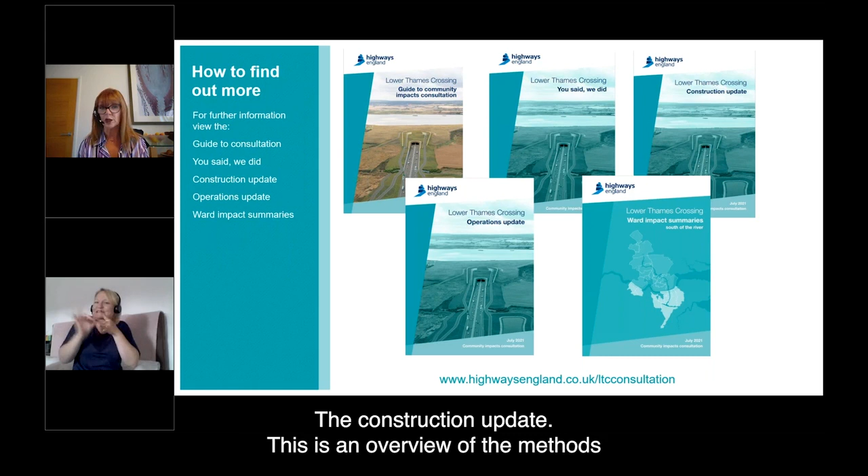The construction update is an overview of the methods that would be used to build the new road and tunnel and changes to existing utilities infrastructure. It also details the measures proposed to mitigate potential adverse effects of construction.

The operations update provides information on the new road, on junctions, the tunnel, utilities, environmental design, and green infrastructure. It also includes the impact the new road may have near you, the changes we've made since the last consultation, some updates to our traffic forecast, and how the new road would impact the environment. Sorry for the little glitch there.

And if I could recommend one set of documents to you, it would be the ward impact summaries. These documents go into a lot more detail about the changes and impacts the new road may have near you during its construction and operation. This covers topics such as traffic, noise, and air quality.

The You Said We Did document is a summary of responses received during our 3 previous consultations and how these have been used to further refine the project's design. And last but not least, we produced a series of maps to help show you the project during construction and when open to traffic. There's also an interactive map on our dedicated consultation website.

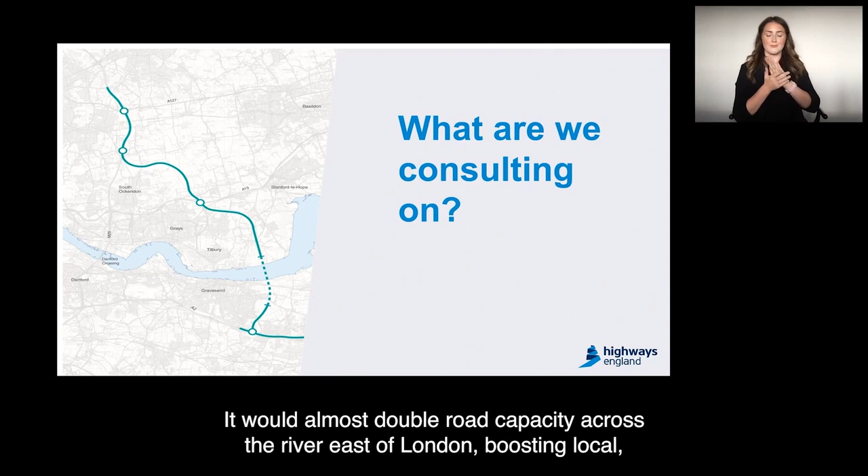Just to recap on that video, the Lower Thames Crossing is a proposed new road connecting Kent, Thurrock, Havering and Essex through two 2.6-mile tunnels beneath the River Thames. It would almost double road capacity across the river east of London, boosting local, regional and national economies, while offering new connections, better journeys and fewer delays.

On the north side of the River Thames, the road would link to the A13 in Thurrock and the M25 in Havering. On the south side, it would link to the A2 and M2 in Kent.

So let me start by telling you more about what we are consulting on. To get permission to build and operate the new crossing, we must follow a specific planning process and seek a Development Consent Order, or DCO.

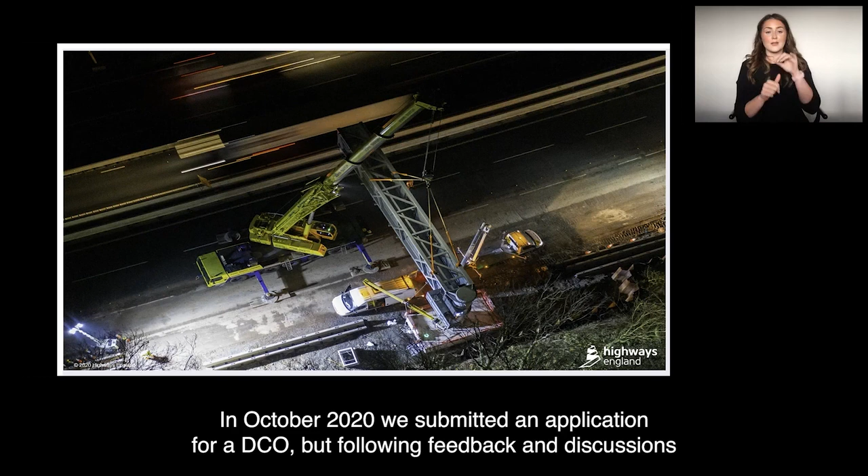In October 2020, we submitted an application for a DCO, but following feedback and discussions with the planning inspectorate, we withdrew it to provide more information.

We've been working to address the inspectorate's feedback, and as part of the process, we are holding this further round of public consultation to seek your views on our plans to build and operate the Lower Thames Crossing and how we will mitigate its impact, changes to the project since design refinement consultation in 2020, and how responses received at each of our previous consultations have informed the development of the project. This is where we start with our presentation tonight.

Consultation and engagement have been critical in helping us design the project to reduce the impact and to maximise the benefits. We've carried out a record-breaking programme of consultation, engagement and design development. Over the last 8 years, we've been in public consultation for over 350 days, with almost 90,000 of you giving us your views.

In 2018, we held a statutory consultation to provide members of the public and anyone with an interest in the project with an update of the route as well as an opportunity to have their say.

This was followed by a supplementary consultation in January of 2020, which was held to obtain people's views on the changes made as a result of feedback from statutory consultation and technical engagement with stakeholders.

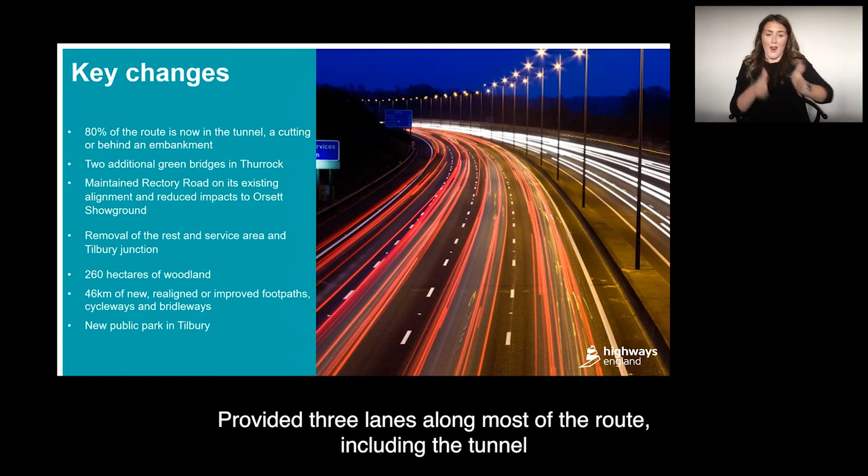These are just a handful of the changes we have made following your feedback. To improve your journey, we have provided 3 lanes along most of the route, including the tunnel. To reduce the impact on the local community, we refined the design of some of the slip roads at the A13 and A1089 junction to reduce visual impacts, move roads away from properties, and improve safety and connectivity.

We've lowered the height of the road in some locations by as much as 5 to 6 metres, which is between 15 and 18 feet. And now 80% of the whole route is in either tunnel, a cutting, or behind an embankment.

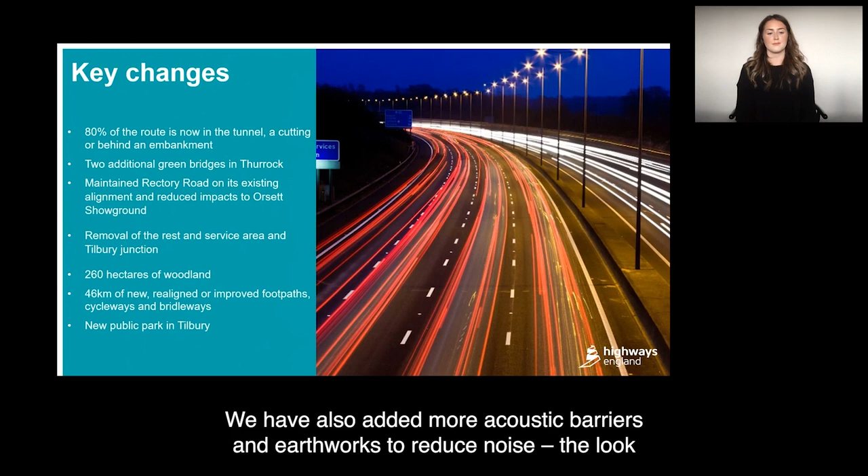We've also added more acoustic barriers and earthworks to reduce noise. The look and material of those noise barriers will be developed by our contractor at the detailed design stage, but you can see their proposed height and their locations in the consultation material.

We've maintained Rectory Road on its existing alignment and have reduced impacts on Orsett Showground. And we have removed the rest and service area, maintenance depot and Tilbury Junction, which had significant impacts on the environment and local communities. To reduce the impact on the environment, we've increased the number of trees we're replanting and are now planning 260 hectares of new woodland, 3 times more than that which we will affect.

We have included 2 additional green bridges and widened some of them to keep the community connected and provide safe routes for wildlife. We've increased the number of new or upgraded walking paths, cycle paths and bridleways to 46 kilometres. That's 2 kilometres of paths for every 1 kilometre of new road. And we are creating 2 new landscape parks.

One of these is at Tilbury Fields, to the south of the Northern Tunnel entrance and overlooking the Thames. We've proposed 2 options for the height here, and we're asking for your views on which option is preferred.

The You Said We Did document is a summary of the responses we received during all of these previous consultations, and how these have been used to further refine the project's design. It discusses each consultation in a separate chapter with a breakdown of the feedback we received, our responses to both negative and positive comments, and how we have made changes to our plans. This document, along with all of our consultation materials, is available on our consultation website.

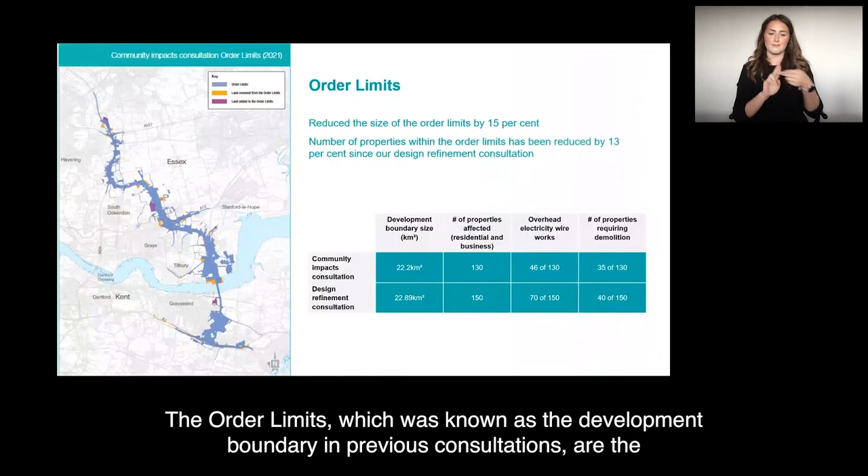Two important ways in which our plans have developed relate to the proposed order limits. This is the land we need to build the new crossing and the utility works. The order limits, known as the development boundary in previous consultations, are the outermost edges of the Lower Thames Crossing project. They show the extent to which land can be acquired or used for the project and are areas in which the development consent order applies.

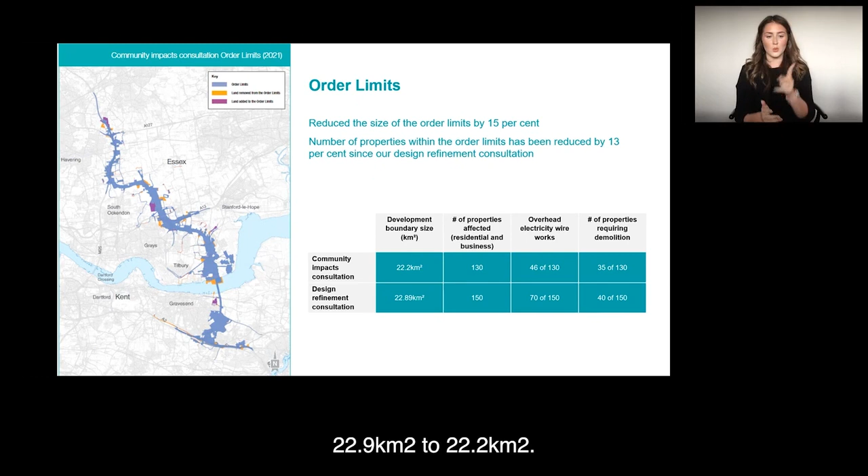Since our last consultation, we've reduced the area within the order limits from 22.9 to 22.2 square kilometres. We've also reduced the number of properties within the order limits to 130 from 150.

We've been working very hard to reduce the impact on the landscape, local residents, landowners and businesses, while also reducing the visual impacts and restrictions associated with the utility networks when the work is complete. Here are some of the key changes.

We've modified the A13 junction and are proposing an extra lane on the link road between the Lower Thames Crossing and the A13 eastbound to the Orsett roundabout. This will provide the additional capacity this link needs.

We found an alternative location for the restringing of overhead power lines north of Linford. We've also changed the route of the utility diversion south of the A1013 and located the utilities along field boundaries to minimize the impact on this area.

We've extended the order limits to the fields east and west of the A1089 to ensure permanent access rights to the overhead line network, and we've reduced the impact on the Ron Evans Memorial Field.

Working with one of our partner gas companies, we've been able to reduce the impact on the Orsett Showground land and the football pitches currently used by the Orsett Park Royals Football Club. Therefore, the proposed replacement area for the Orsett Showground has been removed from the order limits and is no longer needed. All of our changes are listed in Chapter 3 of our operations update.

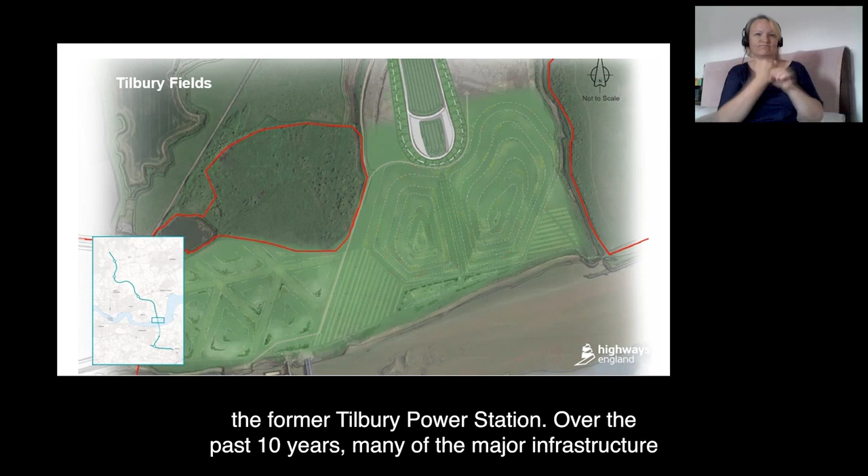Over the past 10 years, many major infrastructure projects in London have contributed clean material to raise the ground level and restore the farmland back to the way it was. We're likely to be the last remaining project to work in this area.

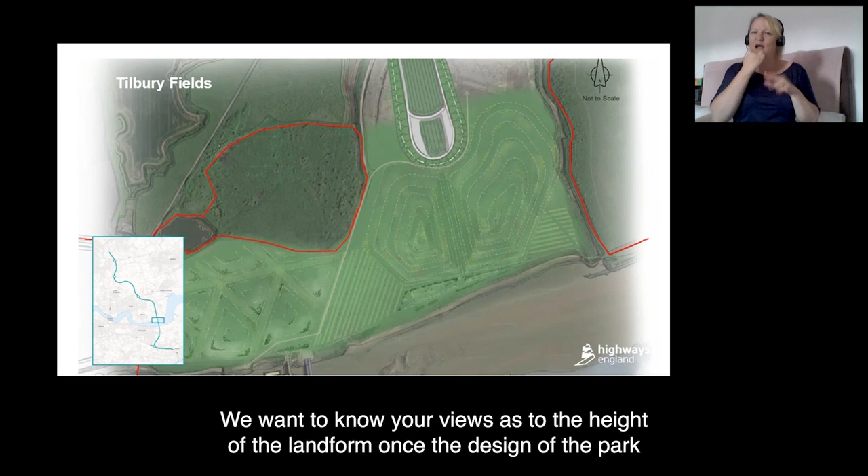Tilbury Fields will be created using some 2 million cubic meters of material dug from the tunnels and associated works in the area. We're able to save around 470,000 lorry movements, as we won't need to transport this material on public roads. We want to know your views on the height of the landform once the design of the park is finalized. You'll find the specific question about this within the consultation response form.

For further information on our open spaces, you can view the guide to consultation and operation documents on our consultation website. I'll now hand back over to my colleague Claire to talk about construction.

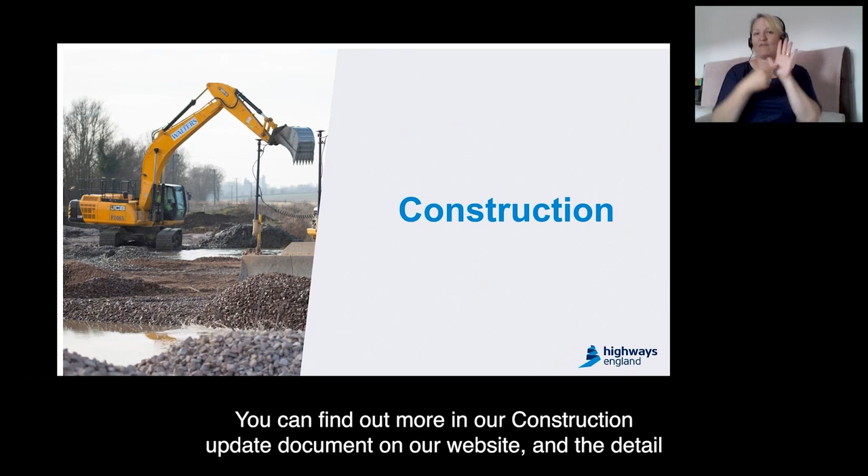So we are absolutely committed to reducing the impact of building the new crossing on you and the environment. In this section, we're going to give you an overview of where we plan to be working in your area and cover the sequence and timing of the work, its potential impact, and our plans to reduce that impact. You can find out more on our construction update document, which is on our website, and the detail is broken down in your area in our ward summaries documents.

Our work will be divided into 4 construction sections to help make sure they're delivered on time and with the minimum impact on local communities, the environment and road users. There are 2 sections in your area in Thurrock and South Essex, Section B and Section C. In today's webinar, we will be covering some more information about those.

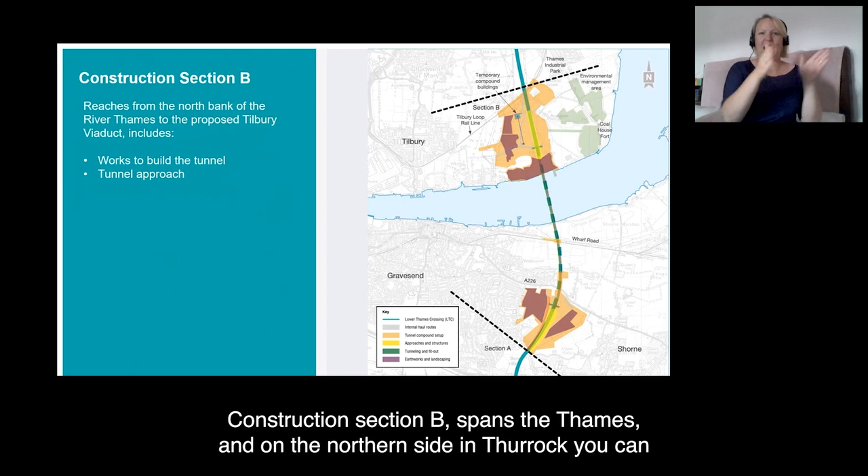Construction section B spans the Thames, and on the northern side in Thurrock you can see the area stretching from the river to just south of the Tilbury Loop railway line. There are 4 proposed construction compounds in section B. 3 are south of the river, so only one of these is in the north near Tilbury Marshes, west of East Tilbury and Coalhouse Fort.

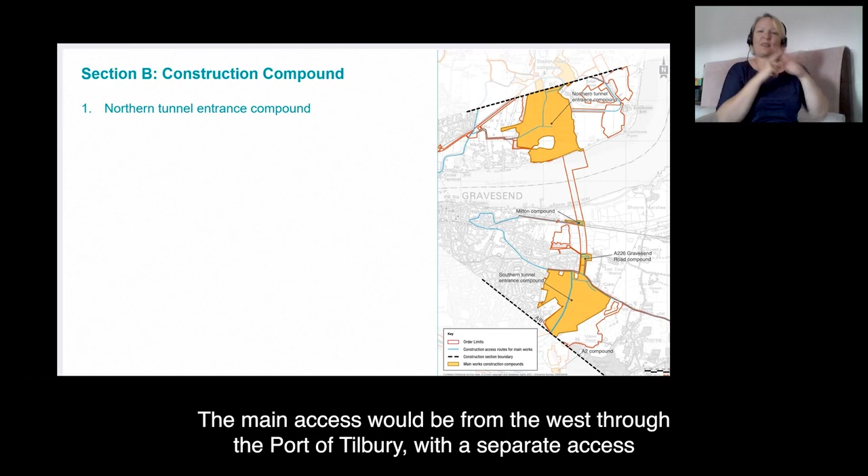It is the northern tunnel entrance compound where the tunnel boring machines will begin their drive underneath the Thames towards Kent. The main access would be from the west through the port of Tilbury, with a separate access for cars and vans from Station Road. These access points would be connected through the site by an internal haul road. Work in this compound would be carried out 24 hours a day.

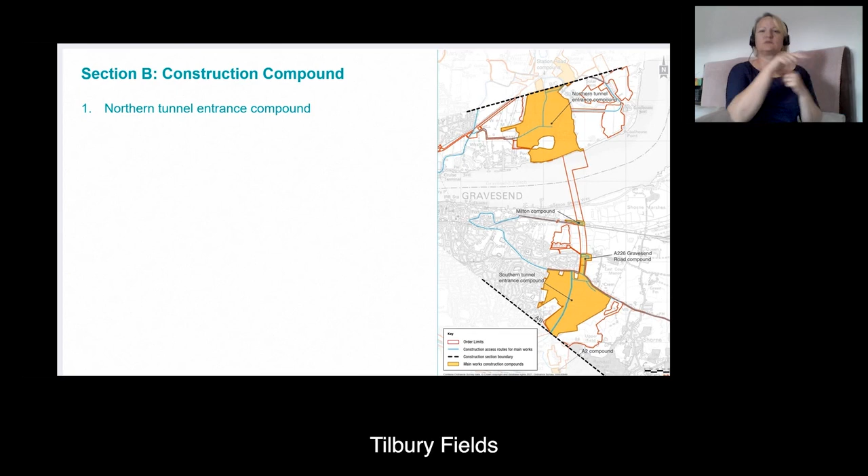The site would include temporary facilities such as a precast facility for tunnel lining production and storage, a separation plant for processing excavated materials, much of which will be used to create Tilbury Fields, a water treatment plant, hyperbaric facilities allowing specialist workers to remain in high-pressure compressed air environments, which would be necessary for certain of our tunnelling activities. Sleeping accommodation for construction workers, which will reduce the impact on local facilities, and other equipment to support tunnel construction, such as cranes and special vehicles to carry segments into the tunnel. Please see Chapter 4 of the construction update for more information.

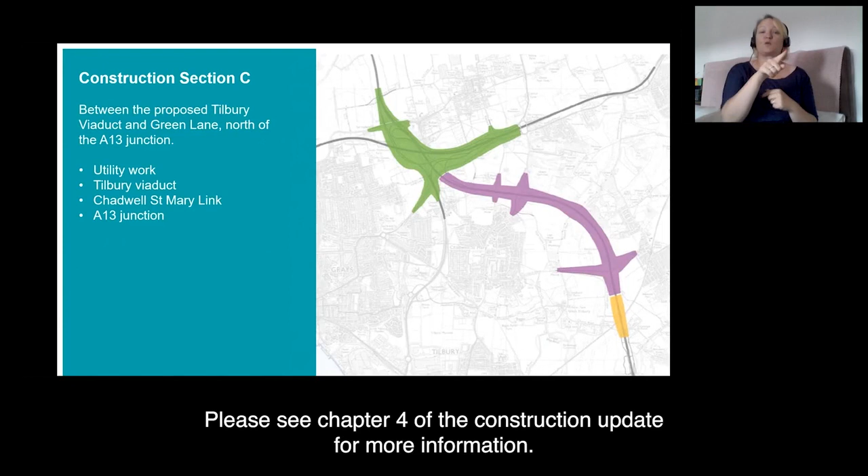Construction section C encompasses the A13 junction with a southern spur reaching down to the Tilbury Loop railway line and up to Green Lane in the north, and to the Orsett Cock roundabout in the east. There are 7 proposed construction compounds in this section C, as you can see here on the map.

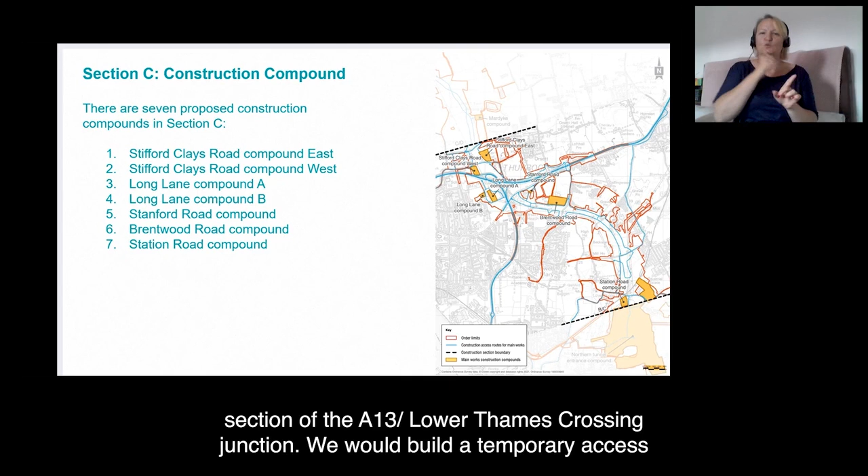Stifford Clays Road compounds east and west. These would be used for the construction of the northwest section of the A13 Lower Thames Crossing junction. We would build a temporary access haul road for the west compound from Medebridge Road. Before then, Stifford Clays Road would be used to access both east and west compounds. When the compounds are taken down, we would remove all temporary assets and the land would be reinstated.

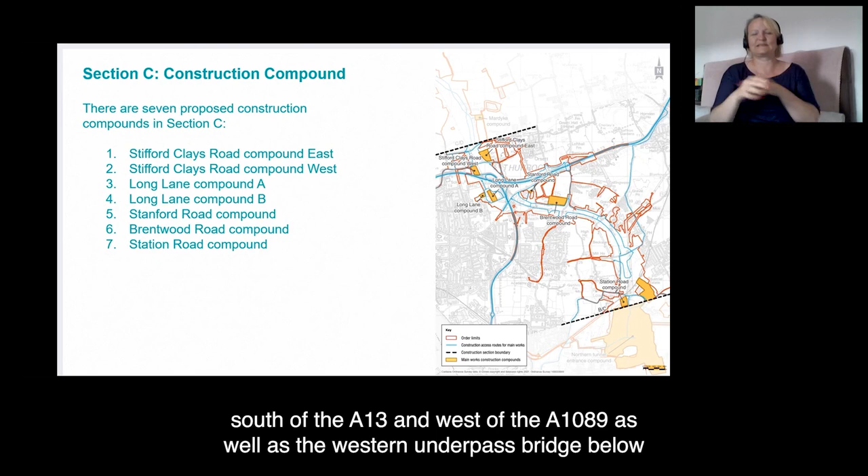Long Lane compounds A and B would be used to support the construction of the slip roads south of the A13 and west of the A1089, as well as the western underpass bridge below the A13. Access would be via Long Lane. We would set up the compounds early in the construction period and they would be in use until August 2028.

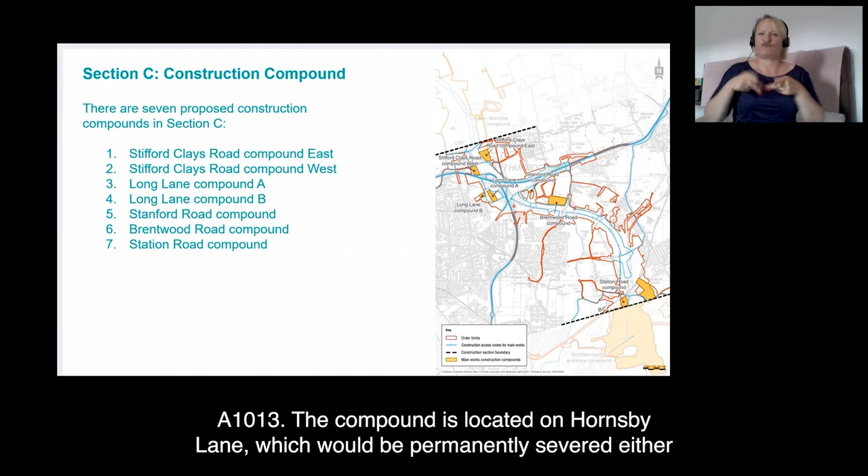The Stanford Road compound would support works affecting the slip roads between the A13 and the A1013. The compound is located on Hornsby Lane, which would be permanently severed either side of the new road. Before the road is closed, we would put in turning arrangements in place. When the compound is taken down, we'd remove all of the temporary utility works and infrastructure, and the land would be reinstated. Brentwood Road compound would support works south of the A13 towards the Tilbury Loop railway line.

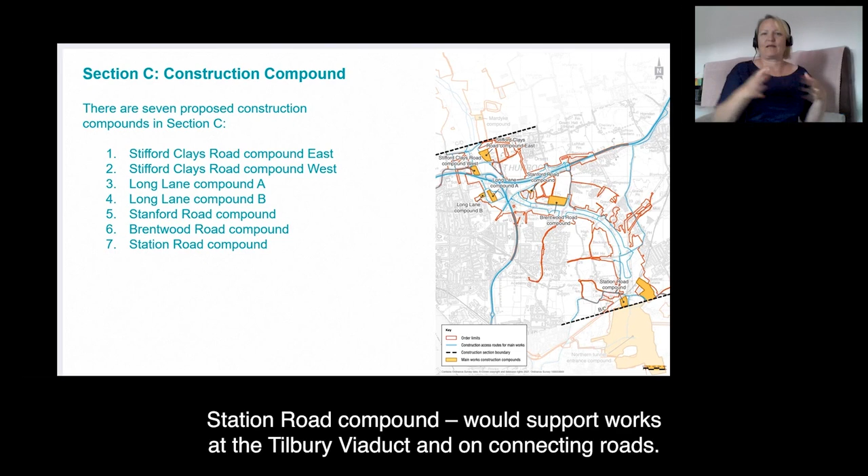Access would be from Brentwood Road between the Orsett Cock Junction and the Lower Thames Crossing route. The compound would be in place from early 2024 to mid-2028. Station Road compound would support works at the Tilbury Viaduct and on connecting roads. It would be in place for approximately 3 years from 2024.

Where possible, temporary utility works needed for each compound would be carried out at the same time as the permanent works to reduce the length of our programme and its impact. Please see the construction update document on our consultation website for more details.

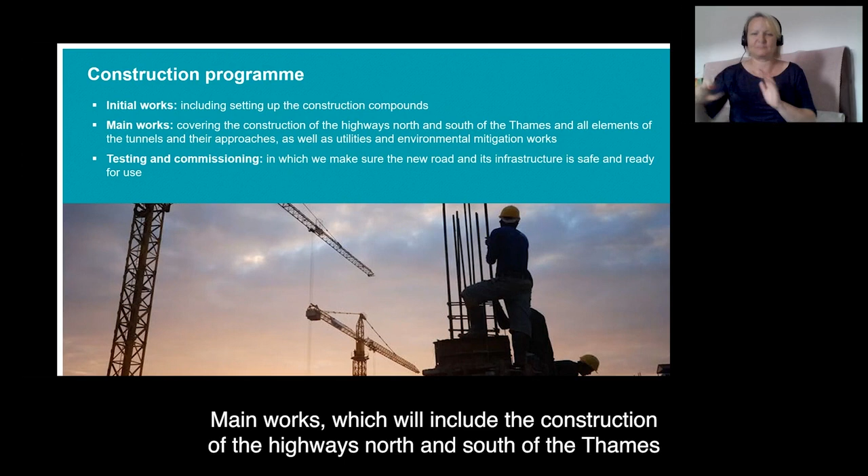Construction in each section would typically cover 3 main phases of work. This includes initial works, which involve setting up the construction compounds, main works, which will include the construction of the highways north and south of the Thames and all elements of the tunnels and their approaches, as well as utilities and environmental mitigation works, and finally, testing and commissioning, during which we will make sure that the new road and its infrastructure are safe and ready to use.

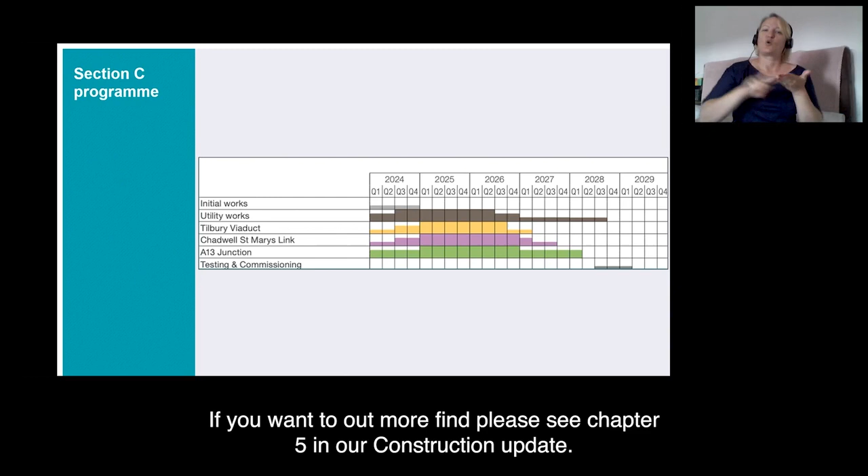Normal working hours are proposed to be 7 a.m. to 7 p.m. on weekdays and 7 a.m. to 4 p.m. on Saturdays, plus up to one hour before and after for start-up and close-down procedures.

Working hours for certain activities, including earthworks, would be up to 10 p.m. on Monday to Saturday. Sometimes we might need an extension, which would be agreed in advance. Tunnelling construction activities and supporting works would be carried out on a continuous 24/7 basis.

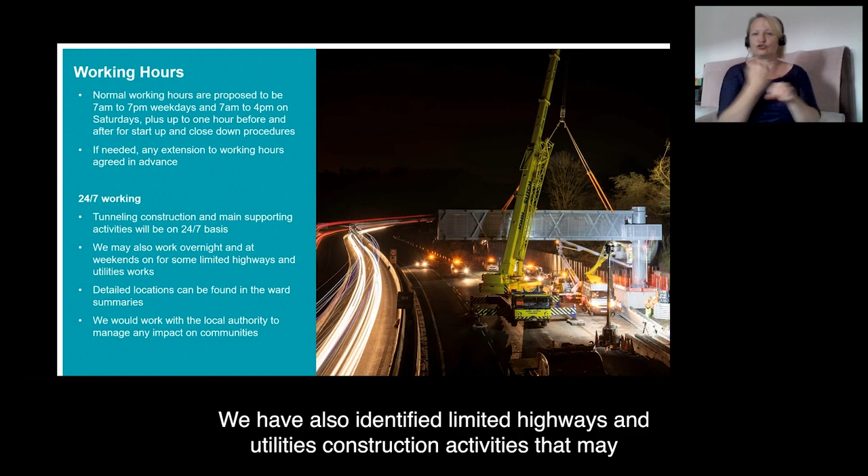We have also identified very limited highways and utilities construction activities that may need to be done overnight and at weekends, for example where we would be tying in new sections of road to the existing road network. These works would be carried out at night and at weekends to maintain safety and reduce disruption to road, railway and utilities networks. They are anticipated to be for short periods, and we would work closely with the local authority to manage any impacts on communities.

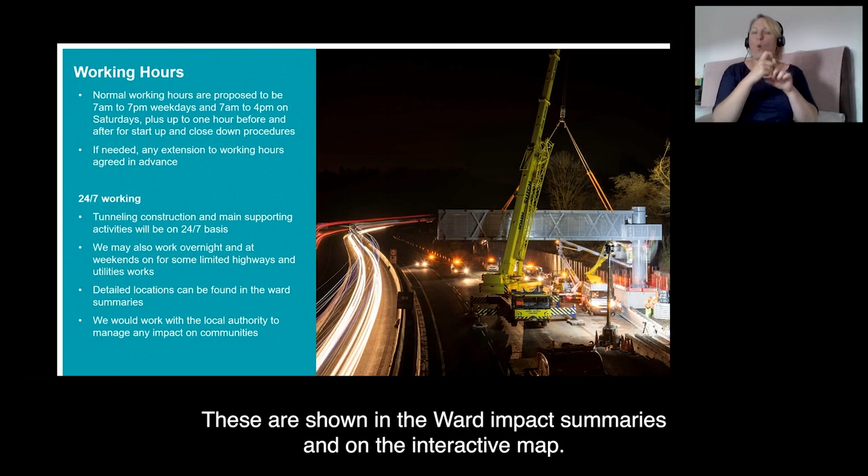These are shown in the ward impact summaries and on the interactive map.

These works will inevitably have an impact on the area, but by applying best practice and using technology, we can reduce that impact. Here are some examples of how.

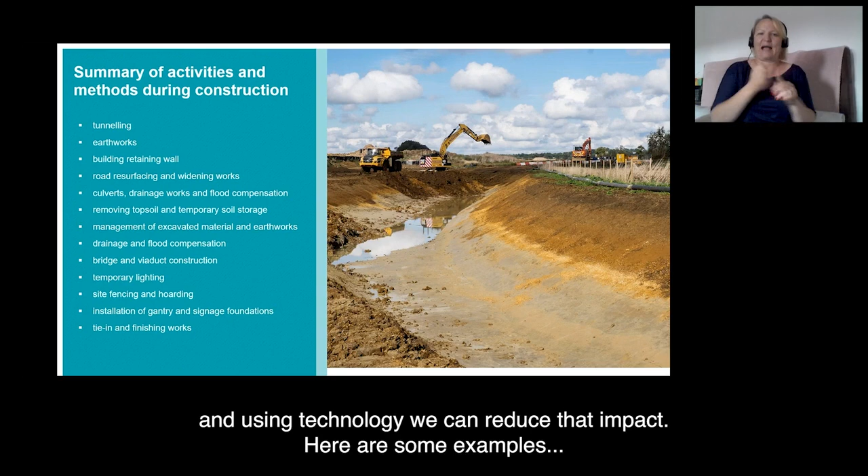We would build dedicated haul roads to significantly reduce the number of construction vehicles using existing roads near the project, and we would promote car sharing and public transport to reduce the number of staff cars on these roads.

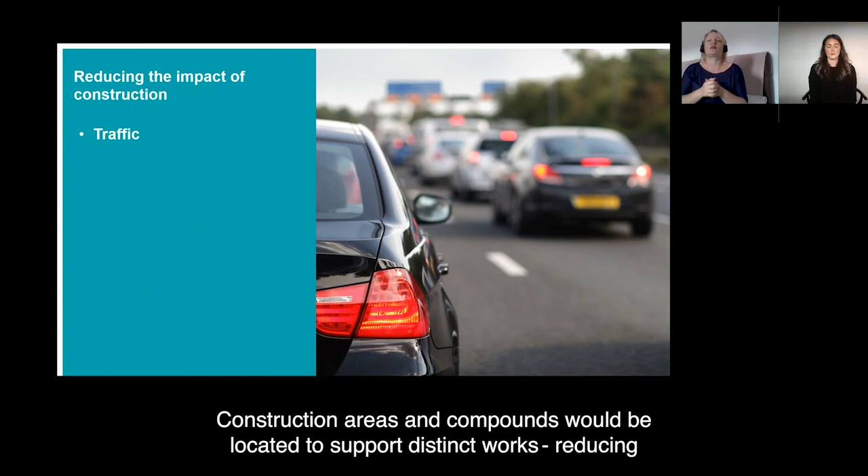We would use established practices and developing technology to minimize impacts on the environment and road users, such as consolidating materials into fewer deliveries. Construction areas and compounds would be located to support distinct works, reducing the need for vehicles and materials to move through the community to reach each location.

We would have a delivery booking system and we would plan and monitor vehicle movements. Multimodal transport, using a combination of road, water and rail, would optimize the transport and delivery of our materials.

In planning, our contractors would produce construction logistics plans, and we would protect vulnerable road users by introducing appropriate measures to protect walkers, cyclists and horse riders.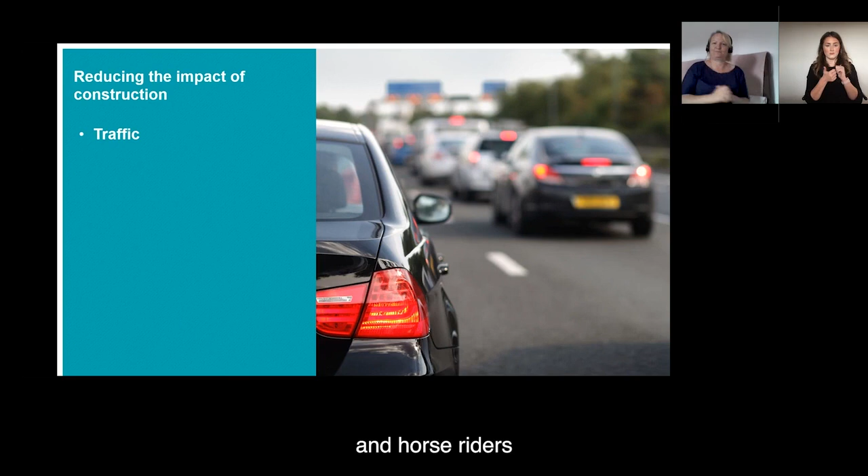By using the methods mentioned, we will reduce our impact on local traffic, but during construction, some bus routes would still need to be temporarily diverted or changed.

When we carry out work next to sensitive railway lines, there may also be some weekend or night closures that will affect rail services. You can find out more detail about what specific services will be affected in your ward in our ward impact summaries.

Some public rights of way, such as footpaths or bridleways, may be affected by construction and need to be temporarily diverted or closed. Some would be closed permanently and replaced by new ones during the construction period or once the new road is complete. Please see our ward summary documents to find out about the impacts near you.

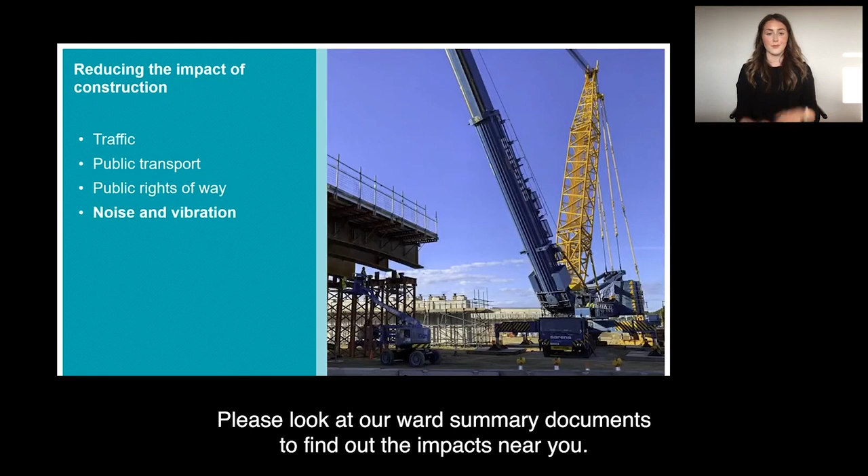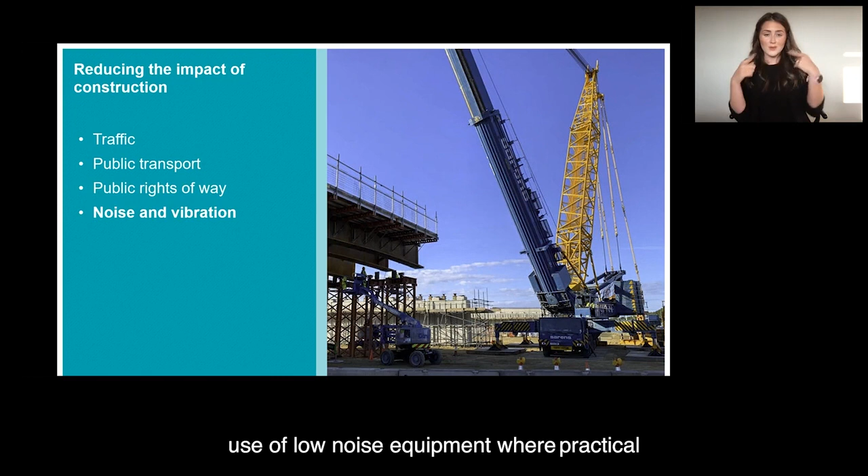To minimise construction noise and vibration, we are proposing to locate our construction compounds as far away from residential areas as possible and build earthworks or bunds around them. We are also proposing measures such as closed board fencing installed around the construction compounds to provide screening, the use of low noise equipment where practical, and locating noisy activities as far as possible away from noise sensitive receptors.

We are also introducing a number of ways to reduce the visual impact of the project on the landscape. Visual impacts will be reduced by carefully considering the location and layout of the compounds, using screens and temporary fencing, and positioning taller facilities as far away as possible from residential properties. We will also look at revegetating stockpiles to soften their appearance.

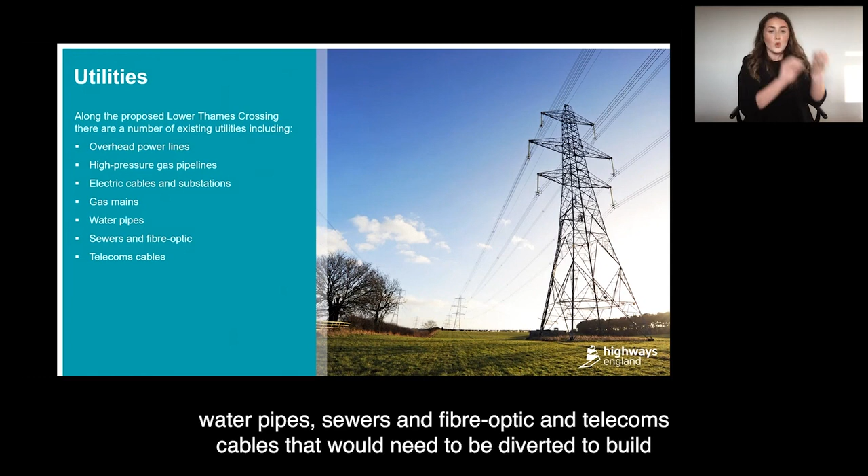Along the proposed Lower Thames Crossing, there are a number of existing utilities, including overhead power lines, high-pressure gas pipelines, electric cables and substation, gas mains, water pipes, sewers, and fibre optic and telecoms cables. These would need to be moved or diverted to build the new road.

Our proposals for the utility works have evolved during the project's design and development. We've been working closely with utilities companies to significantly reduce the environmental impacts and shorten the duration of these works. There should be no disruption to the supply of power, water, or any other utilities caused by our construction work. For more information on the planned utilities works, please go to Chapter 2 of the construction update.

When we apply to the Planning Inspectorate for permission to build the new road, we will provide a range of documents that set out how we would make sure contractors effectively manage the impacts of construction on the environment and local communities. These are called control documents, and we are providing drafts of them as part of this consultation. They include the Code of Construction Practice, which provides a framework for how we would manage construction activity, and it becomes a legally binding document that will ensure we deliver the environmental mitigation commitments we have made.

If permission to build the new road is granted to us, the control documents would be developed further by our contractors and, once agreed upon, those contractors would have legal obligations to comply with the conditions they contain. Control documents are discussed in more detail in Chapter 1 of the construction update. For further information on all construction activities, please see the construction update document on our consultation website.

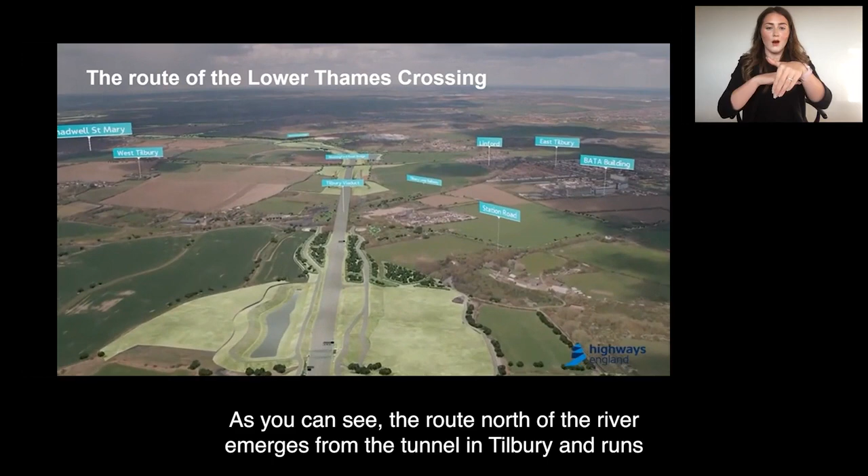This video gives you an overview of how the new crossing will look in Thurrock and South Essex. As you can see, the route north of the river emerges from the tunnel in Tilbury and runs north. It passes over the Tilbury Loop railway line on a viaduct and continues north between Chadwell St Mary and Linford. The route then heads northwest and passes under Muckingford Road and Holford Road green bridges. There are a couple more bridges as it swings to the west before it meets the A13 junction.

To see a full fly-through of the route, please see the construction website.

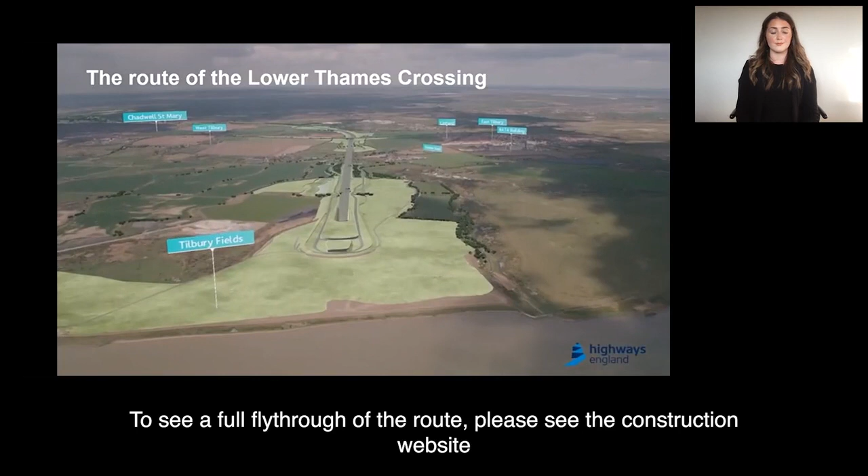We've carefully assessed the road network in the area and predicted how it might perform in the future, with and without the new crossing, known as the do something and the do minimum scenarios. If the Lower Thames Crossing is not built, it's expected that high levels of traffic using the Dartford Crossing would lead to more incidents, increased journey times, and more delays where traffic conditions are worse than typically experienced. We predict traffic would be nearly 12% higher in the morning peak and nearly 28% higher in the evening peak if the project were not built.

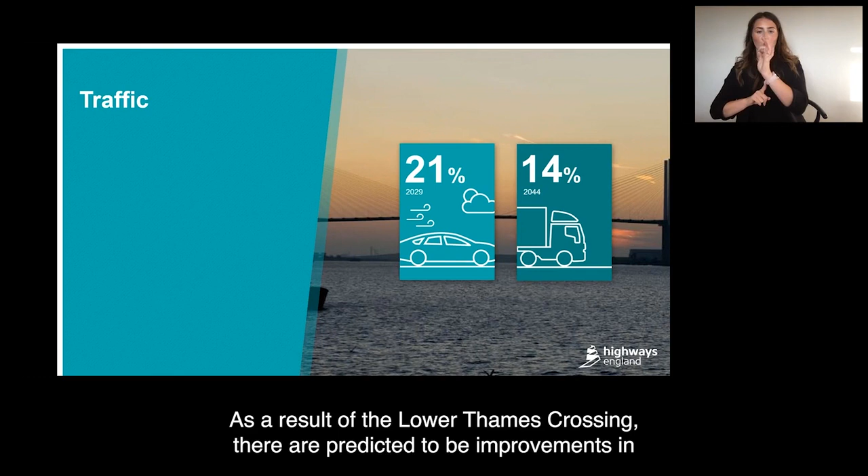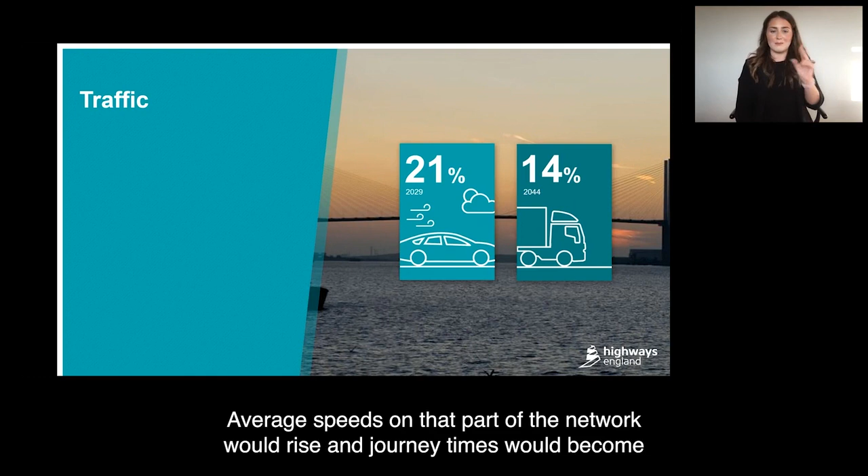As a result of the Lower Thames Crossing, there are predicted improvements in how the road network operates around the Dartford Crossing and on other roads in Gravesham and Thurrock. On the wider road network, conditions would remain largely unchanged, but congestion is predicted to increase on some roads, particularly those close to the project. When built, the level of daily traffic using the Dartford Crossing would fall by an average of 21% in 2029 and 14% in 2044 compared to the do minimum scenario. Average speeds on part of the network would rise and journey times would become more reliable.

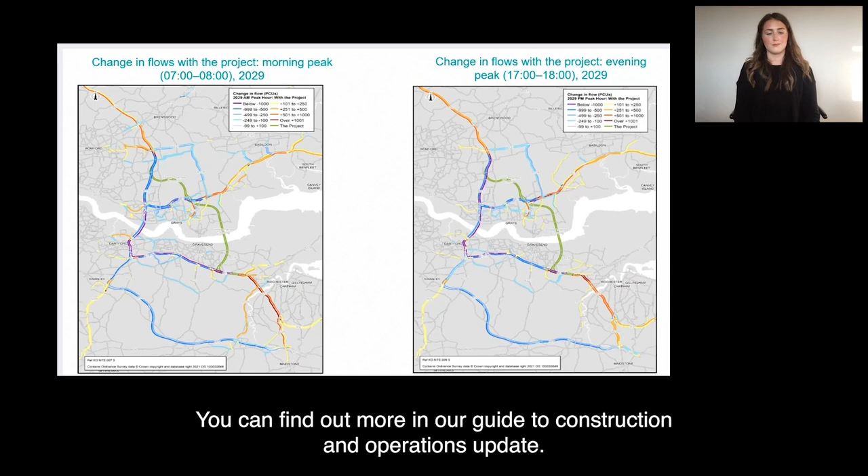In our Operations Update, you can find precise maps of the impacts in your area, but to summarise, on many roads surrounding the crossing, such as the A13 west of the Lower Thames Crossing and the Dartford Crossing, the number of vehicles would fall when the Lower Thames Crossing opens. However, some roads on the approach to the new crossing would see an increase. You can find out more in our guide to construction and operations update.

We've developed measures to reduce the noise and vibration at sensitive locations, such as people's homes or on wildlife, along the route and on some existing roads. For example, we've located the road as far as reasonably practical away from noise-sensitive locations. We've also designed the new road to be at low level, with approximately 80% of the route in a cutting, false cutting, or tunnel.

Used earthworks where possible to reduce noise. Mitigation measures will also include the use of low noise road surfacing technologies on new road and resurfaced roads, and noise barriers at certain locations along the route where the earthwork measures are not possible. In regard to vibration, the impacts from road traffic vibration would not be significant because the Lower Thames Crossing new road surface would be constructed in accordance with highway specification that ensures a smooth road surface.

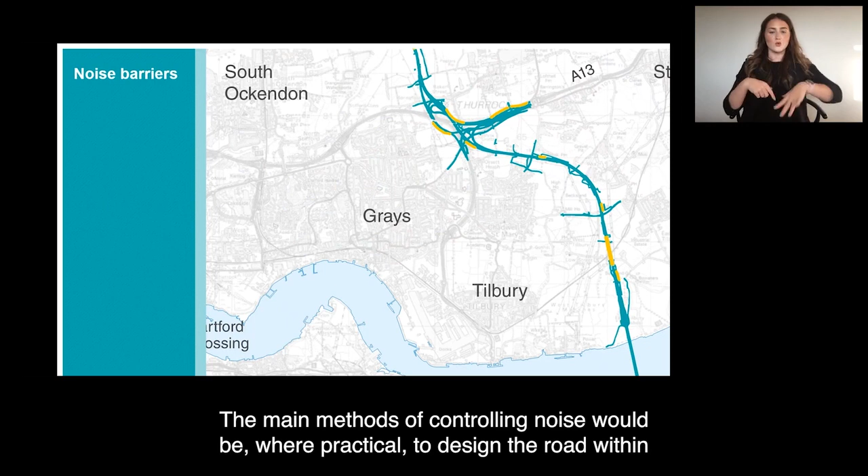The main methods of controlling noise would be, where practical, to design a road within landscape features such as cuttings and bunds or walls of earth. However, where impacts are the greatest, we would still install noise barriers, typically fences or wooden fences, in addition to these earthworks features. The use of low noise surfacing would also reduce the traffic noise once the road is in use. This map shows where noise barriers have been incorporated into design along the A13 along the new road.

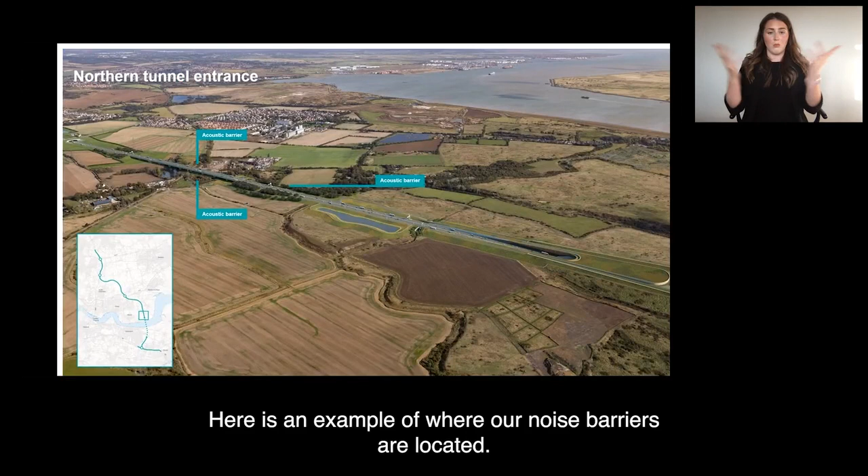Here's an example of where our noise barriers are located. You can find out more about the location of the proposed noise barriers in Chapter 5 of the Operations Update.

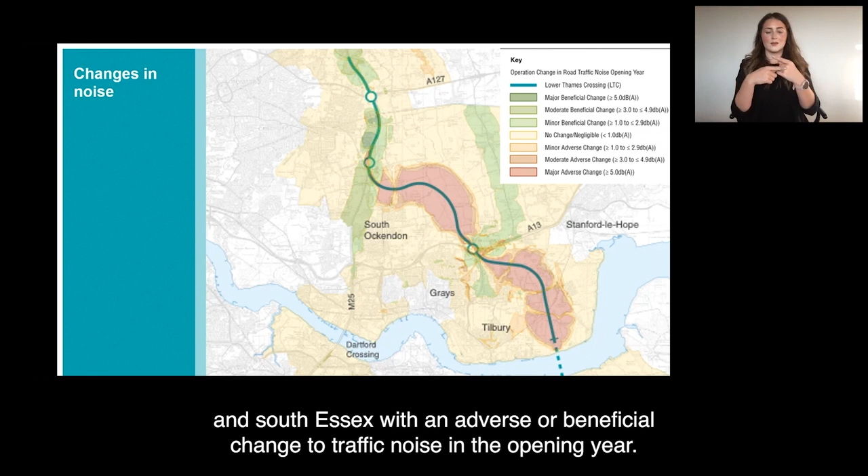This image, contained in the Operation Update, shows the areas in Thurrock and South Essex with an adverse or beneficial change to the traffic noise in the opening year. As you can see, there are some areas with a major adverse change of greater than 5 decibels and some with no change and major beneficial changes. To find out more about specific changes to noise in your area, please see our ward impact summaries.

We've reduced the visual impact of the road by placing around 80% of the route in a cutting, false cutting, tunnel, or where possible use earthworks or new planting to conceal the road.

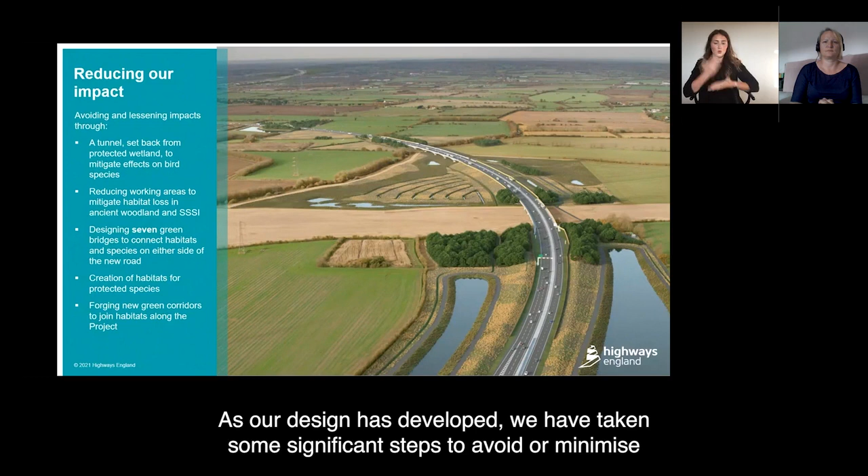As our design has developed, we've taken some significant steps to avoid or minimize significant effects on local communities and the environment where possible. Some examples include a tunnel set back from protected wetland to mitigate the effects on bird species, reducing working areas to mitigate the habitat loss in ancient woodland and SSSI sites, designing 7 new green bridges to connect habitats and species on either side of the new road, the creation of habitats for protected species, and forging new green corridors to join habitats along the project route.

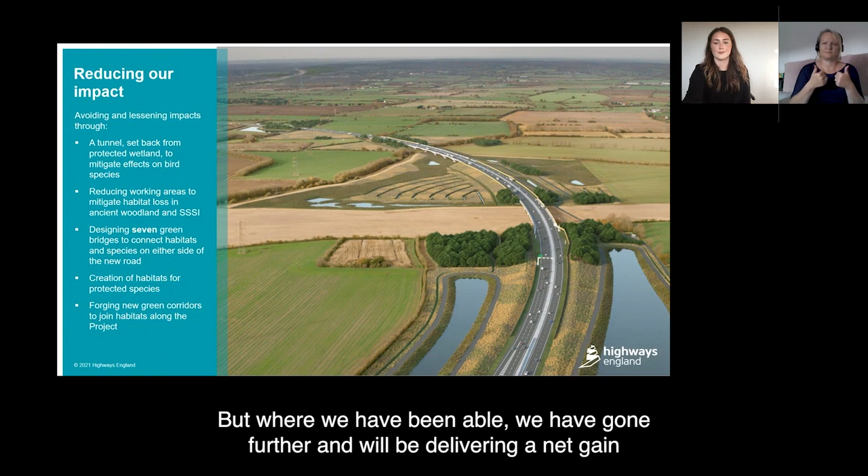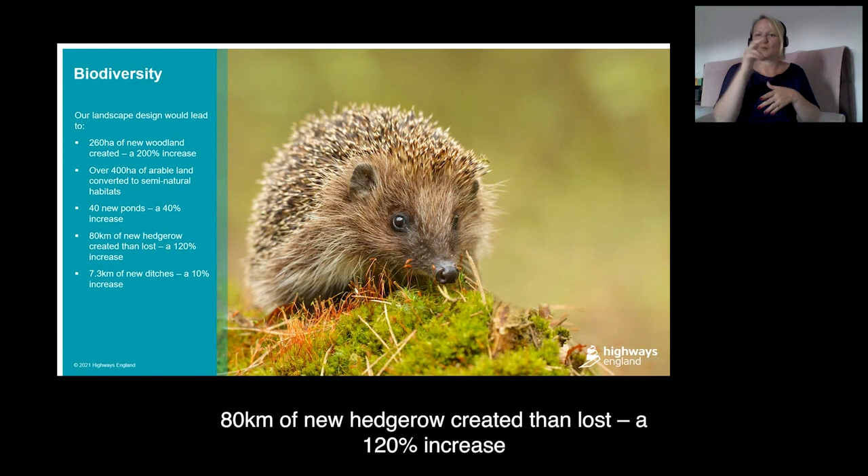But where we've been able to, we've gone further, and we will be delivering a net gain in biodiversity value across the Lower Thames Crossing area. This includes 260 hectares of new woodland created, a 200% increase, over 400 hectares of arable land converted into semi-natural habitats, 40 new ponds representing a 40% increase, 80 kilometers of new hedgerow than lost, a 120% increase, and 7.3 kilometers of new ditches representing a 10% increase.

There are likely to be impacts on the journey times of some bus and coach services if traffic speeds of the roads they use are changed once the new road opens. Most of the routes would not be affected, and the impact for individual passengers would depend on where they get on or off at a particular service. For further information on specific bus routes it would affect, this can be found in Chapter 4 of the Operations Update.

Working with local authorities and organisations such as Sustrans, a UK-based walking and cycling charity, we've developed a programme of improvements for walkers, cyclists and horse riders that will connect local communities with green spaces and promote active travel choices. Following previous consultations and targeted stakeholder engagement, we developed a walkers, cyclist and horse riding strategy, which we shared at our design refinement consultation that examined the value of existing and potential routes.

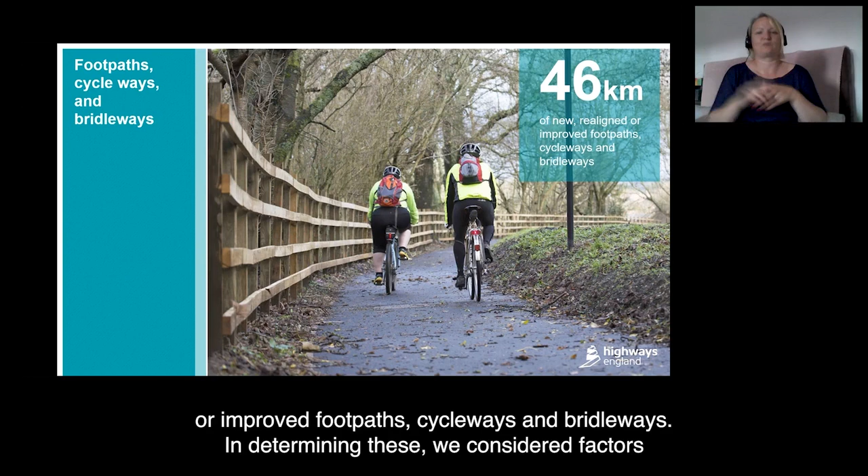A list of possible opportunities was developed that would result in 46 kilometers of new, realigned or improved footpaths, cycleways and bridleways. In determining these, we considered factors such as connections for employment, education, recreational green space, as well as addressing historic severance. More detail on assessing the environmental impacts and mitigation is available in Chapter 5 of the Operations Update, and local information is available in the ward impact summaries.

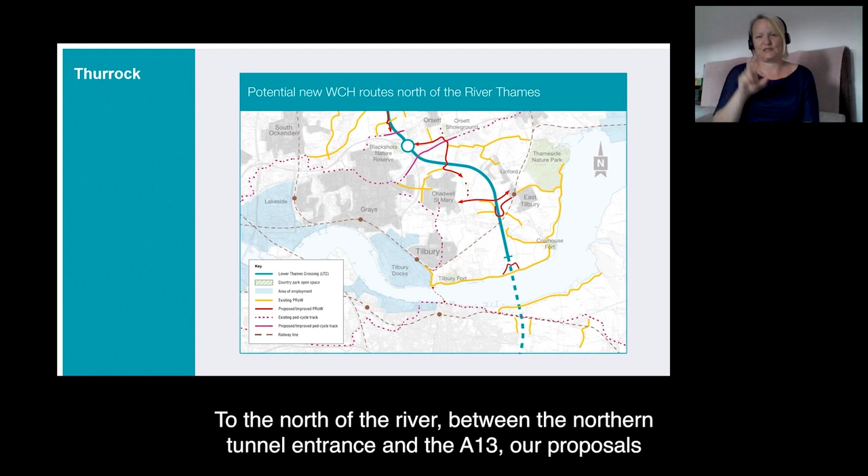This slide shows the proposed new, realigned and improved walking, cycling and horse riding routes to the north of the River Thames. Between the Northern Tunnel entrance and the A13, our proposals include east to west commuter connections to make it easy to access employment by bike, also mitigating the severance caused to East Tilbury and Linford.

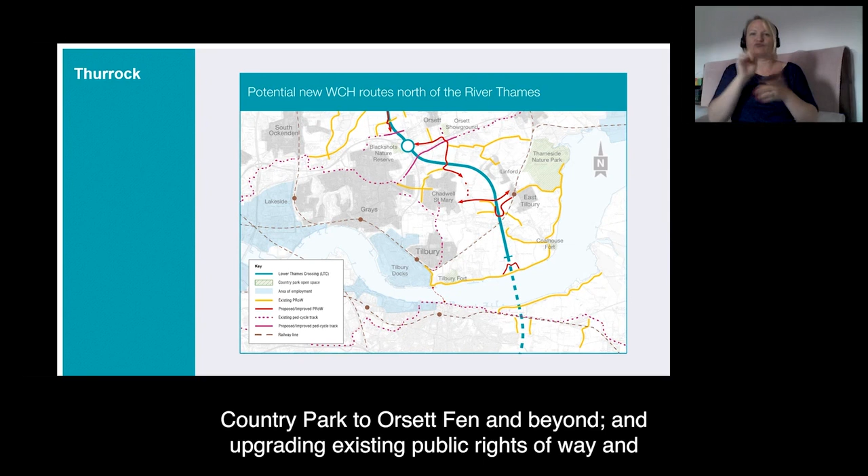Between the A13 and around the M25 junction, improvements include creating recreational walking, cycling, horse riding routes from the Thames Chase and South Ockendon Little Belhus Country Park to Orsett Fen and beyond, and upgrading the existing public rights-of-way along the additional sections to create routes that loop around and connect people to green spaces.

I'll now hand over to my colleague Claire, who will talk about air quality.

Thanks, John. We fully understand that many people have concerns about the effect that the project will have on air quality. Although during operation of the Lower Thames Crossing, some areas are predicted to experience decreased air quality due to changes in traffic flows across the region, there will be improvements in other areas and an improvement in air quality in the project-wide area overall.

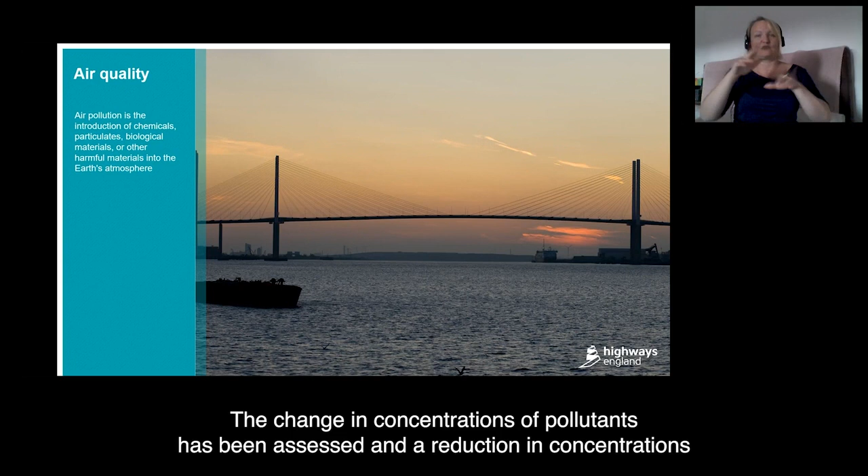The change in concentrations of pollutants has been assessed, and a reduction of concentrations of nitrogen dioxide and particulate matter is predicted at receptors between existing conditions and future conditions before the Lower Thames Crossing opens.

One of the key aims of the project is to relieve the congested Dartford Crossing and approach roads and improve their performance by providing free-flowing north-south capacity. The Lower Thames Crossing would take over 13 million vehicles off the Dartford Crossing, which means it would be less congested and air quality could improve.

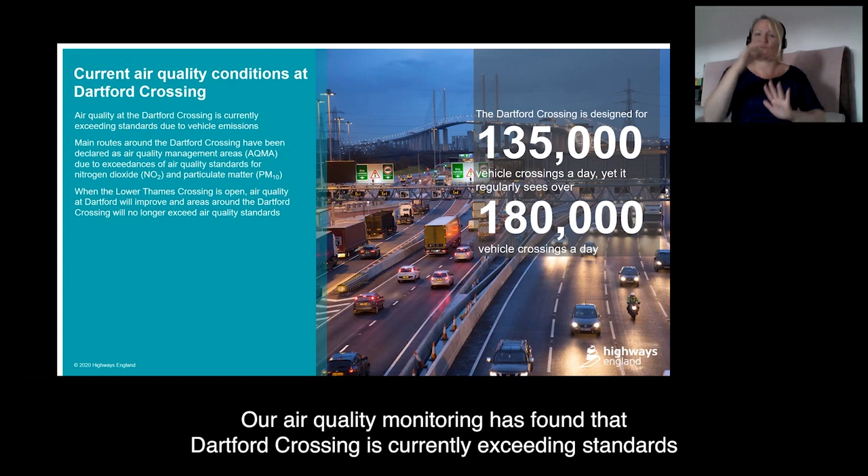Our air quality monitoring has found that the Dartford Crossing is currently exceeding standards due to vehicle emissions. When the Lower Thames Crossing is open, air quality at Dartford would improve and areas around the Dartford Crossing would no longer exceed air quality standards.

There are expected to be reductions in vehicle emissions over this period, for example, due to the uptake of electric and alternatively fueled vehicles, in part driven by the banning of sales of diesel and petrol cars from 2030.

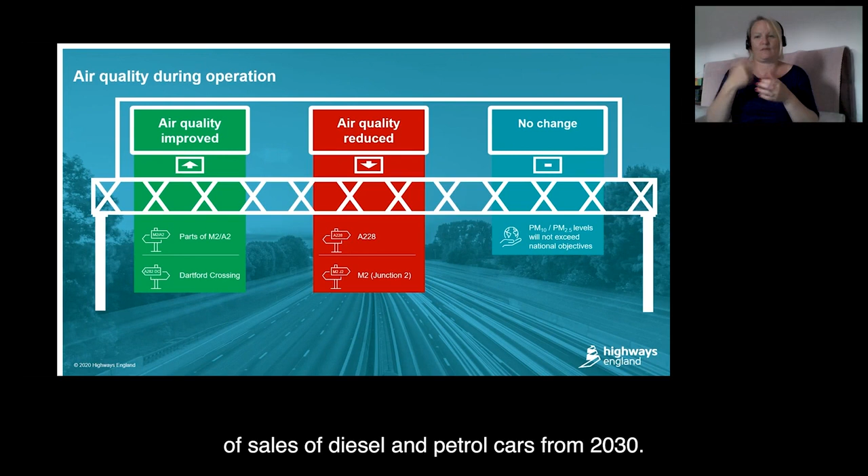At opening year, based on the model used for our first DCO application in 2020, the assessments show that there would be localised increases on certain roads, such as the M2 junction 1 to 2, causing air quality to get worse and exceed the national air quality objective for NO2.

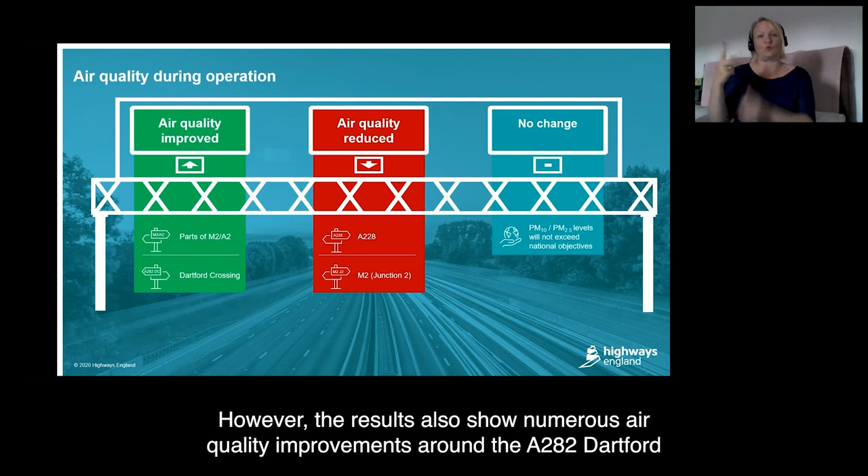However, results also show numerous air quality improvements around the A282 Dartford Crossing, where existing air quality is poor, due to significant reductions in traffic and congestion.

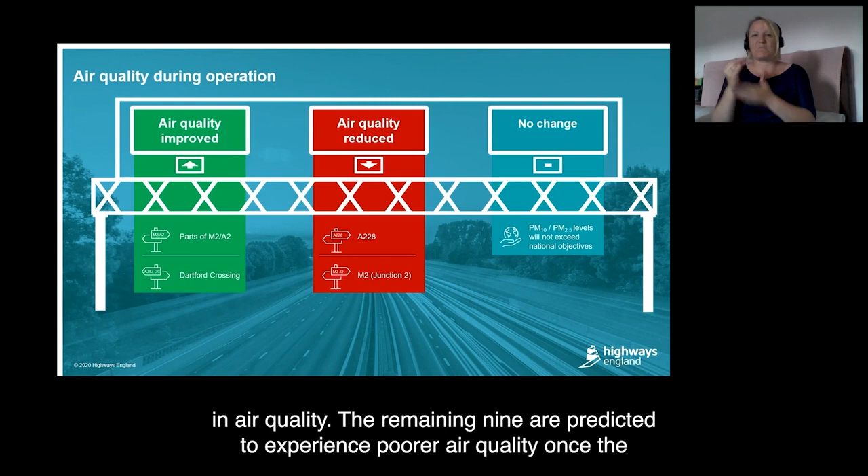In total, 24 receptors are expected to experience a change in air quality in those areas where concentrations of pollutants are forecast to exceed the air quality objectives set out by the government. Of these 24 receptors, 15 are predicted to experience an improvement in air quality. The remaining 9 are predicted to experience poorer air quality once the route is open.

Our air quality assessments are based on the traffic flows predicted from the traffic model, which is explained in Chapter 4 of the Operations Update.

One of the biggest operational changes as a result of the Lower Thames Crossing is an improvement to traffic flows and a decrease in journey times across the River Thames and across many parts of the Lower Thames area. One clear benefit of this is faster, easier access to existing jobs in the local and wider area.

In our ward impact summaries, we flag how many existing jobs this brings within a 30-minute and 60-minute commute of your local area. In this area, the largest increase within a 30-minute journey by car would be in the wards of Tilbury, where some residents would have access to more than 225,000 additional jobs, over an 80% increase.

When you look at what jobs you could reach within an hour, the increase is even greater. The largest increase within a 60-minute journey time by car would be for those who live in East Tilbury, where 615,000 jobs would fall within a 60-minute journey time by car, a 34% increase. These journey times are based on travelling at morning peak times between 7 and 8 a.m.

You can find out more about operations when the road is open in our operational update.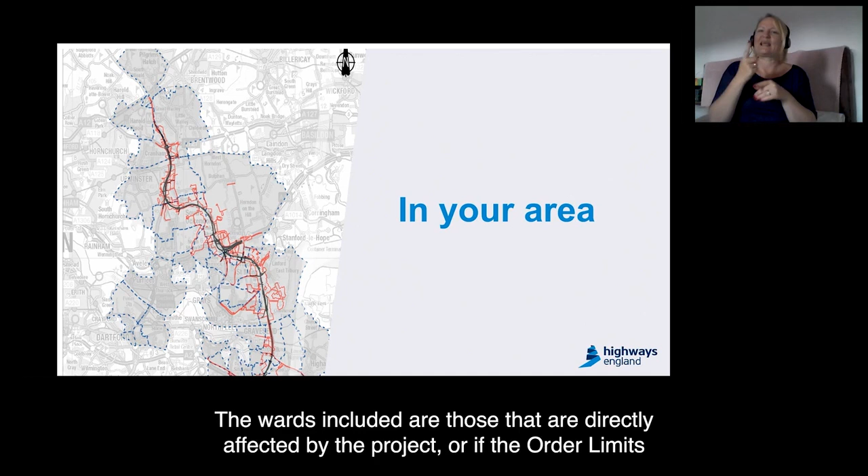The wards included are those that are directly affected by the project or where the wards fall within the order limits.

To make the ward summaries more user-friendly, we have split the document into 3 sections to cover wards to the north and south of the River Thames. There are 2 sections for the north of the Thames, covering 12 wards shown here.

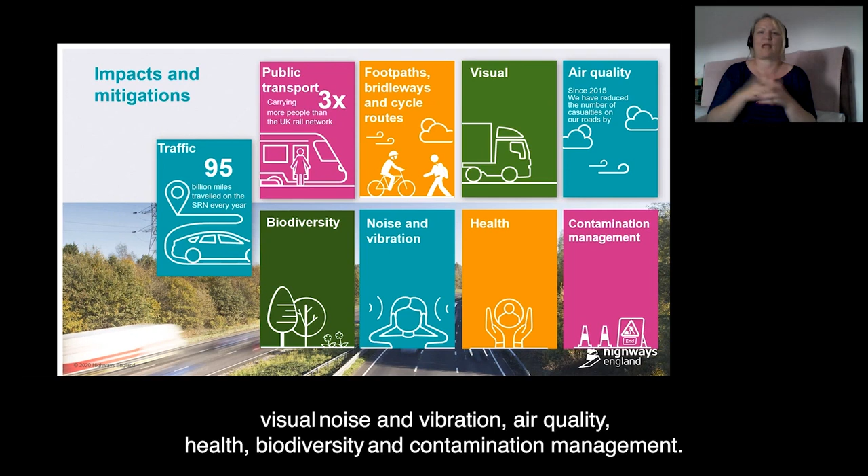In each chapter, we summarise the current situation and explain how construction and operation would affect the ward. We set out what the impacts are predicted to be and the measures we would use to mitigate them. Where there are no impacts, this is highlighted. Ward summaries cover the following: traffic, public transport, footpaths, bridleways and cycle routes, visual, noise and vibration, air quality, health, biodiversity and contamination management. To find out more about the construction and operational impacts of the project, please have a look at the ward impact summary for your area. And with that, we'd like to thank you very much for your time, and we'll hand you back to the

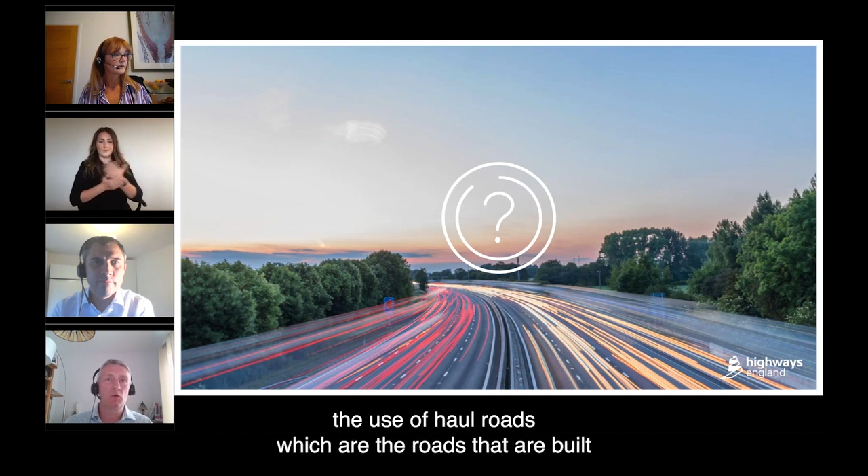As stated previously, we will be looking to maximise the use of haul roads, which are the roads that are built within the work sites that are only used by construction vehicles, and this will significantly reduce the number of vehicles on the public road network.

We'll also look, as I said earlier, to reuse as much material as possible to reduce the number of heavy goods vehicle trips. And where closures are required, our contractors would plan any closures or traffic management with the relevant local authority. Our contractors will also have a number of rules and regulations that drivers who work for them and their subcontractors must follow, such as set routes to and from the site and speeds.

And all contractors will be members of the fleet operator recognition system, the Considerate Constructors Scheme, and also construction logistics community safety standards, and these are standards that set out the good behaviours that we would expect of drivers using the public network. The roads affected, the proposed traffic management and the purpose and the duration of any traffic management are detailed within the ward summaries.

Thank you, Gareth, there from one quite broad-ranging question and answer to quite a specific one now. Tim, I wondered if you could take this next one. We've been asked, what's the impact on Whitecroft's care home?

So Whitecroft Care Home, which is up near the A13, is one of our concerns. Residents in there are some of our closest neighbours, and it is very close to all of the construction works associated with the A13 junction. Doing right by them is one of our top priorities.

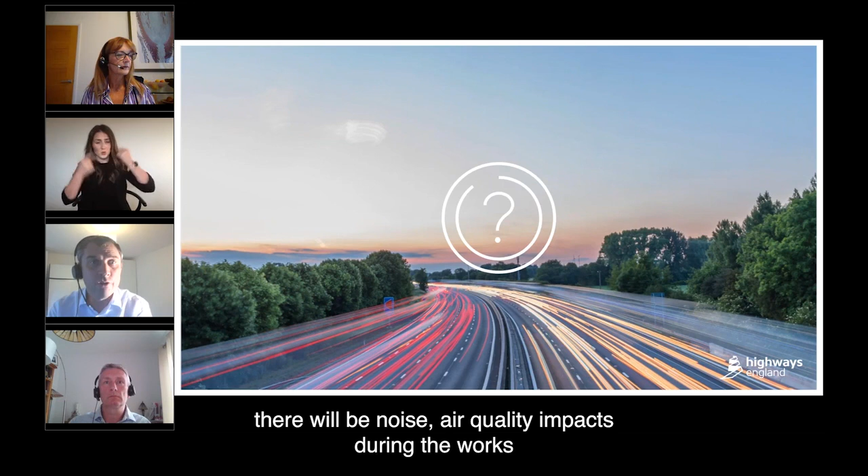But because of their proximity to the works, there will be noise and air quality impacts during the works, which we will look to mitigate with various control measures. These are set out in the Code of Construction Practice documents and the Register of Environmental Action and Commitments, which form part of the consultation.

We're working closely with Whitecroft Care Home to keep the owners fully informed of our proposals and the plans as we develop them further. And we've shared the findings of our environmental impact report with the care home and are committed to keeping in touch as the project progresses. In particular, we've engaged with the care home's noise expert to work through more details with them so that they fully understand the nature of the works that will be happening next to them.

Absolutely. Thank you, Tim. Thanks very much indeed. Gareth, next question for you. Have you increased 24/7 working, and what specifically is planned, if anything, around Baker Street?

Thanks, Sarah. We have now developed more information on our planned working hours, particularly for a number of the services and utility diversion works. With the exception of the tunnel activities, normal working hours are proposed to be 7 AM to 7 PM on weekdays and 7 AM to 4 PM Saturdays, with some preparation and finish times beyond that.

There are some additional locations where we may need to carry out some very limited overnight and weekend works. This is to reduce any disruption caused by our works to the existing road network, trains, or utility works, where it will be safer for the public and staff to work at night.

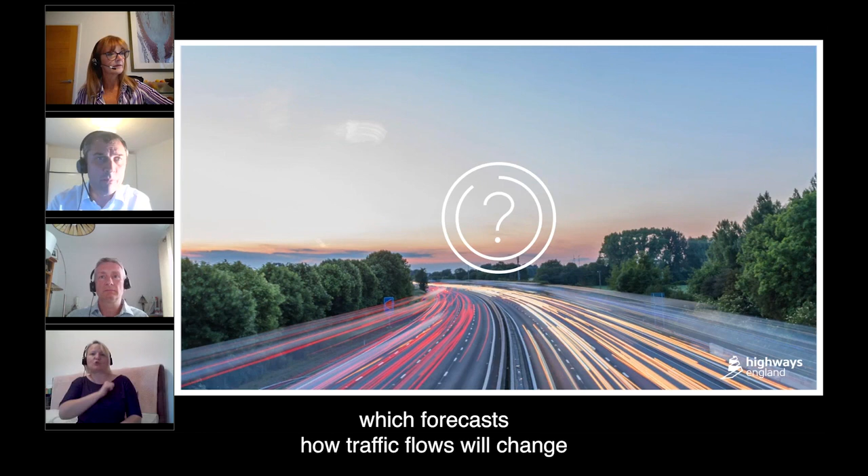We carry out detailed assessments of the expected noise impacts, and in order to do that we take the traffic model which forecasts how traffic flows will change, and we use that to calculate how much noise will be produced from the road on local sites and communities along the length of the scheme.

From that, and understanding how these communities are impacted, we choose where we need to site the noise barriers in order to reduce that impact, mitigate that impact, and include those into our proposals.

The noise barriers are used to dampen and minimise the sounds of road traffic noise by providing a block, essentially, between the source of the noise on the road and the homes. And the way that noise travels means that the barrier needs to be placed at a certain height in order to effectively create that barrier between the source and the residents.

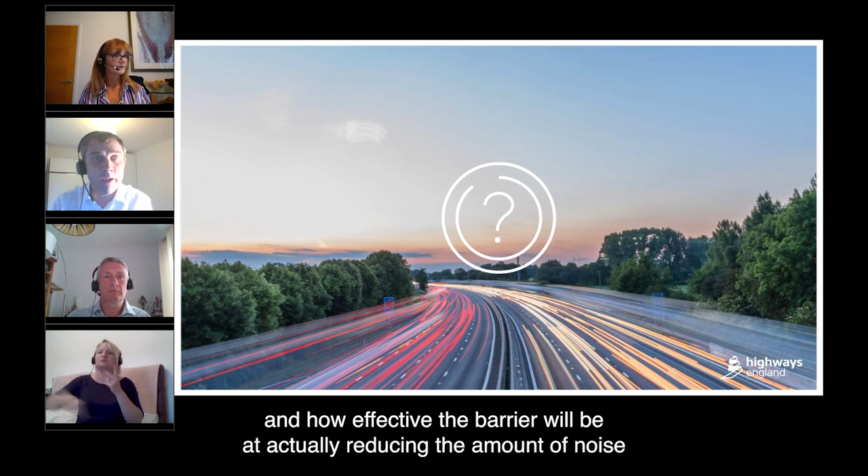Therefore, when we calculate the height of the barrier, we're thinking about a number of different things. We're thinking about where the source of the noise is along the road. We're thinking about where the community, the receptor, is located and how effective the barrier will be at actually reducing the amount of noise that transfers across.

Though we do consider other aspects as well, and in certain locations we will look at lower heights where there's a significant visual impact. It is worth noting that we do have some high noise barriers in the Thurrock area, which relate to the physical relationship between the road and the house. So along the Tilbury Viaduct, where the route is above ground level, we include noise barriers along that stretch.

And next to several very nearby residential properties in Muckingford Road and Brentwood Road, we also have some noise barriers. And at the A13 junction, near the Travellers site, Baker Street and Orsett. It's also worth noting that 80% of the route is either below ground level or within a false cutting, which provides screening of the road and reduces both the noise and the visual impacts.

That's great, thank you Tim, really helpful explanation. Gareth, another question for you coming now, asking why is there an additional lane onto the A13?

This is really down to the new developments that have been given planning consent since our last consultation. Now we've taken into account those new developments, there's now an increased capacity on those roads linking the Lower Thames Crossing to the A13 eastbound and to Orsett Cock roundabout. So we require the additional lane to account for that additional capacity.

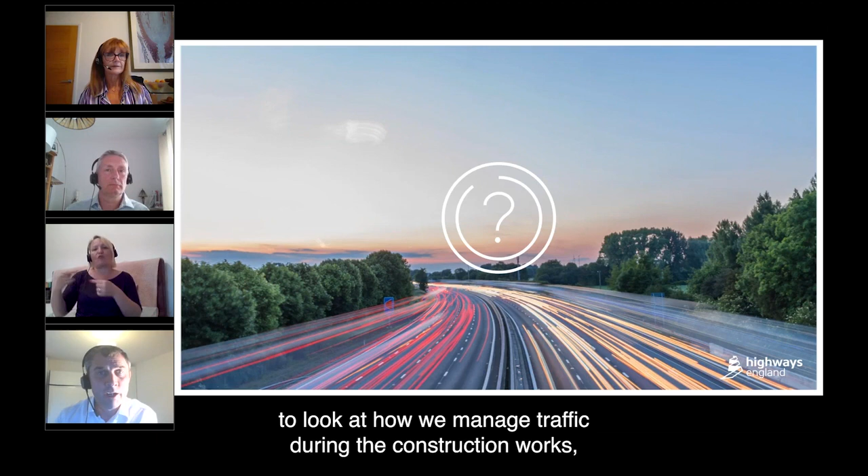Gareth talked about a number of measures we've put in place to control traffic during construction, and we'll be working with the local authority to manage traffic, both our construction traffic and the needs of the community who also need to travel around the area while we're constructing. Those measures are set out in one of the draft documents in the consultation, the outline traffic management plan for construction, so you can look there to see what measures are being put in place and understand how we're proposing to control the impacts during that period.

Thank you, Tim. I'm going to ask you to answer what I think will be our last question of the evening. We've had a question about the use of the Dartford Crossing currently, asking, are numbers really back up to their pre-pandemic levels? Have you got any information about that?

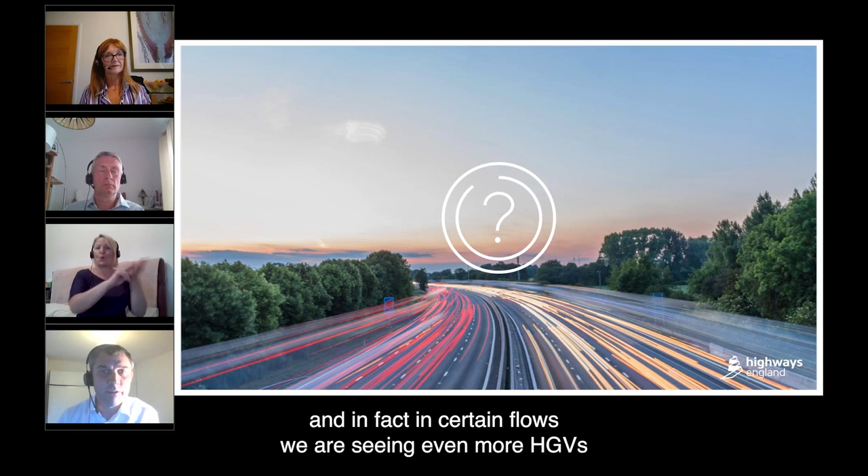Yes, it's been quite interesting watching traffic flows through the COVID pandemic. Clearly, as we've all gone through very different changes in our lives, we've seen a lot of variation, with some quite significant drops during the very strict lockdowns when minimal numbers of people were actually leaving their homes. However, as the lockdowns relaxed, and long before the recent changes in regulations, the flows on the Dartford Crossing returned to normal. In fact, in certain flows, we are seeing even more HGVs travelling across the Dartford Crossing than we saw back in 2019.

Even during the pandemic, Dartford regularly exceeded its design capacity of 135,000 vehicles a day, and in the last month it's had its busiest day ever for freight. So although COVID is likely to change how we work going forward, and is likely to affect a lot of different things about our society, what we have seen is that the Dartford Crossing remains as important as ever, and actually remains as congested as ever. That really leads us to still need to deliver the Lower Thames Crossing.